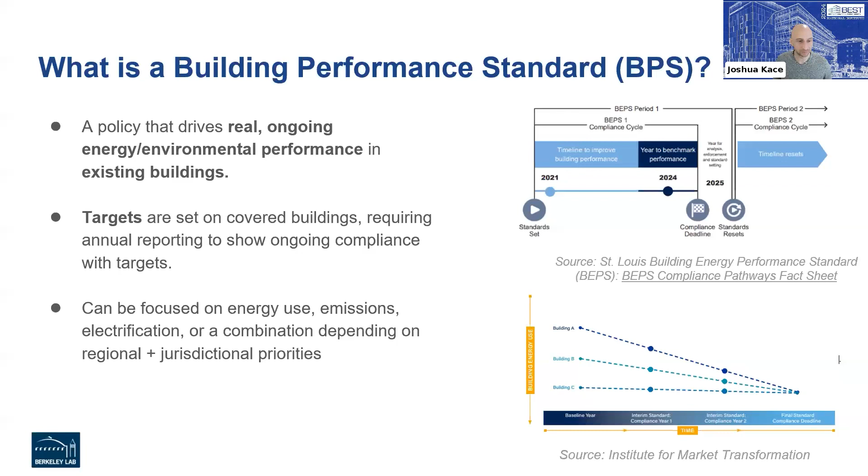So you might have a target, as we're showing in this visual, in 2024, and then a second compliance cycle forward looking into 2025. Each of those targets has different implications for each individual building. Most of the time, these targets are set at the property type level, but they are also sometimes set at individual buildings, depending on adjustments and other things that go into the overall administrative and compliance process associated with BPS.

And so we are seeing a lot of these policies pop up across the country. As I mentioned before, it is a relatively grassroots approach. Standardization has been coming, especially over the past 3 to 4 years. A lot of the work that we do here at LBL is to support standardization and transparency of these policies. But the growth is undeniable in terms of the number of cities, counties, or states that have committed to BPS as something they are looking to implement.

We're typically talking about larger buildings when we talk about BPS. So most policies are either 25,000 square feet and larger or 50,000 square feet and larger. There are a few policies that are going smaller than that over time on more of an iterative basis.

But right now, the cohort of buildings—this was led by President Biden standing up what's called the National BPS Coalition, a coalition of jurisdictions that have essentially committed to implementing BPS in the coming years—this current cohort represents 20% of the building square footage nationwide. So this is really in the early stages, as I was saying, but still already looking to affect a large population of buildings across the US.

There is also a federal BPS that was announced in December 2022. That applies specifically to federally owned buildings and has a couple different nuances associated with their approach, a little bit more focused on on-site fuel consumption, but it is also a huge step in the direction of ongoing performance evaluation of buildings. ACEEE is one of many organizations that have shown the overall savings potential associated with BPS implementation.

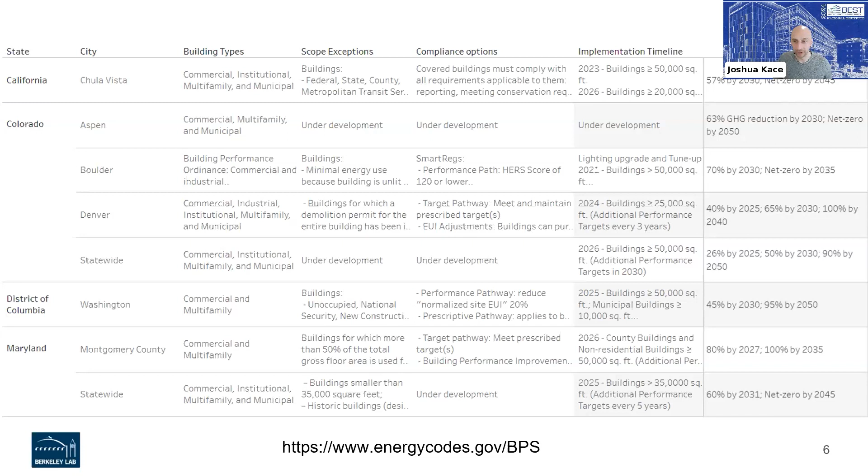And with that, I'll turn it over quickly to Nora to give a primer on the Better Climate Challenge. Thanks, Josh. So we're shifting gears just a little bit.

Josh was talking about building performance standards, which are required by jurisdictions for buildings in their areas to meet certain goals for energy use or emissions. Now I'm taking a step back to talk about the Better Climate Challenge, which is a voluntary program.

Organizations that commit to the Better Climate Challenge are joining this program that is run by the U.S. Department of Energy, and Berkeley Lab, where I work, is providing technical assistance.

When an organization joins the Better Climate Challenge, they are voluntarily committing to reduce their portfolio-wide emissions, scope 1 and 2, by 50% within 10 years. So organizations in this challenge may have certain buildings that fall under a building performance standard, while also having this large portfolio-wide target they want to meet for their whole portfolio.

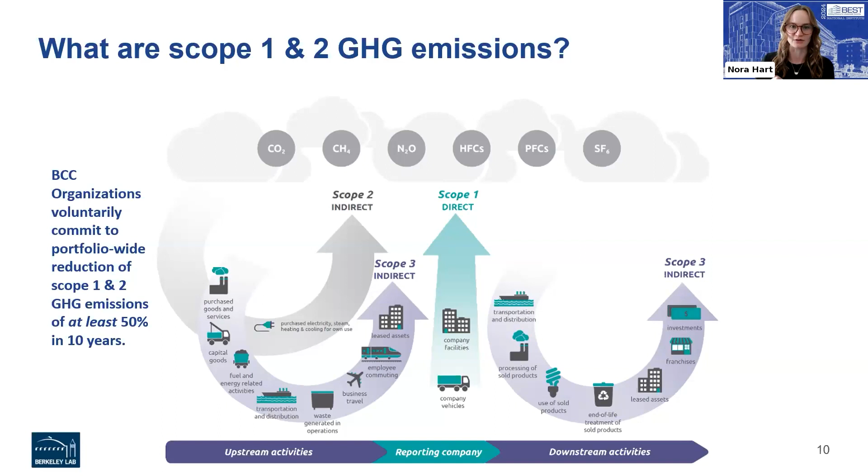Yeah, thanks, Nora. And it's a great introduction. Probably the question you all have in the back of your head right now is, why are we talking about these two things together? The reason why these things are tied together is really related to the fact that they're both supporting whole market adoption of high performance buildings.

They're doing it in different ways, obviously. Better Climate Challenge is a voluntary program. It's built around recognition. It's about forging new pathways for buildings at the cutting edge of either new technologies or new operational practices that drive decarbonization and that performance.

Building performance standards, on the other hand, are a little bit more focused on the late adoption side of the market, right? And this isn't just buildings that are being less proactive. There are real, both financial, organizational, and technical reasons why buildings, especially existing buildings, operate inefficiently today, despite the best intentions of a particular building owner, property manager, et cetera.

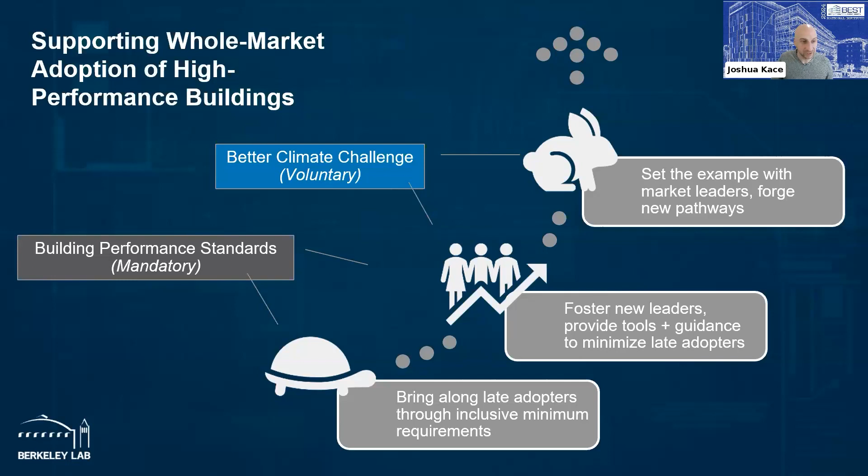And so we like to see these concepts sort of work in concert to help drive the market overall, based around the concept that you have new pathways and you have carrots and sticks associated with driving annual energy performance of buildings.

The other thing that really, almost more important than anything else, that ties these two things together is the empirical nature of the way that Better Climate Challenge and building performance standards operate. What do I mean by empirical? Your actual utility bills are going into whether you comply or not.

This is in comparison to, again, new construction codes where you may be able to design a building that operates efficiently, check prescriptive boxes in terms of either an energy model or design elements of a particular building, and be in compliance.

This is instead looking at the retrospective of how the building actually performed and evaluating you based off of that. And so because of that, design is only one of the dimensions you really need to be concerned about when you're looking at overall building compliance.

The other major component here is operations. You could have an extremely well-designed building. I can definitely say, as a former energy auditor in New York City, I have done audits of LEED platinum designed buildings with incredibly advanced control systems that are operated very poorly and are now really looking at big annual fines associated with their poor performance.

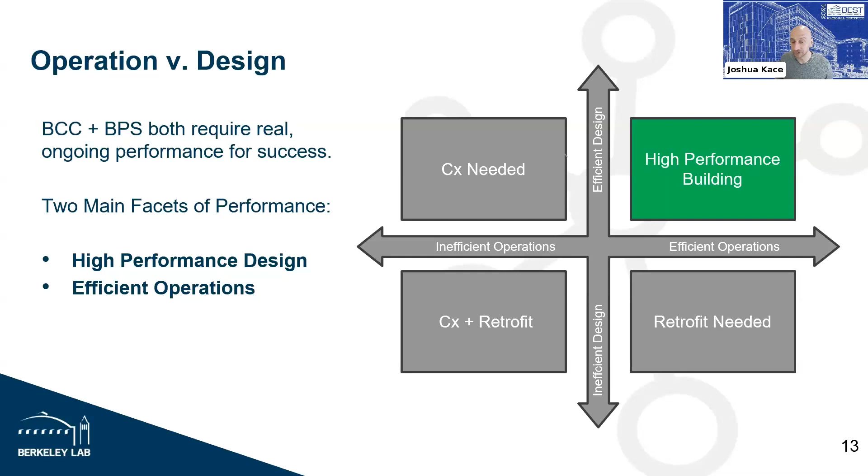And so this chart is really here to show the fact that design and operations really need to work in concert if you're going to drive a high performance building.

Just to put a little bit more of a point on this in terms of the dimensions I'm showing here, design could be anywhere from a net zero energy passive house design down to aging systems with a leaky envelope and pneumatic controls. You could have the best operator in the world, but if they're looking at that overall infrastructure at their building, they're probably going to struggle to comply with the BPS and or be delineated as a high performance building.

And so operations, again, and design need to come together to drive annual performance and ongoing performance of individual assets.

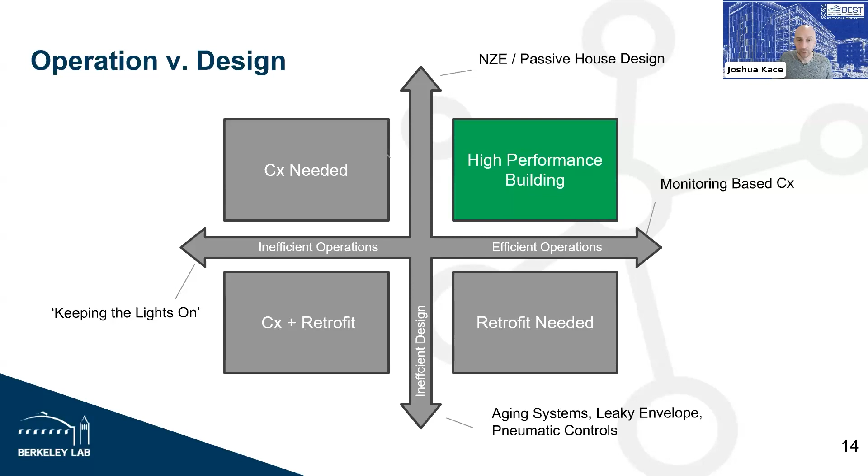So beyond the concept of operations and design, there are a lot of different barriers that exist in our market that prevent both of these dimensions from being realized. Over time, Better Climate Challenge and the BPS team have worked together and established really comprehensive lists of different barriers that exist, bucketed by—you can see here we're showing technical barriers.

That's obviously going to focus within the world of building performance for many, many years. You need equipment that is efficient. You need building envelopes that are extremely effective. Things like energy recovery.

Existing infrastructure being able to be converted into a new infrastructure based off of either a fuel type you need to use or overall performance you're trying to achieve. Technical barriers is one of those big buckets, but it's only one of the buckets. Market is just as important when it comes to making sure there's an associated financial interest in upgrading your building. Again, this market is tackled both by BPS and BCC in different ways.

And then organizational practices. So you could have energy efficiency projects on deck that make a lot of sense. You may not have the organizational structure to be able to make a strong decision on that. It's either not being prioritized or it's an unknown, right? A lot of organizations don't necessarily have the expertise to be able to say XYZ opportunities exist in my building for implementation. And it's hard to invest in something if you don't necessarily know the savings associated with it.

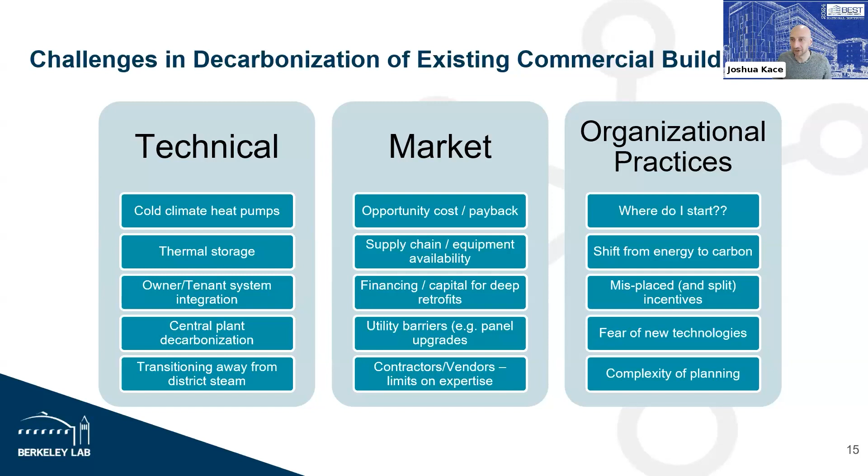So I'm going to go through each of these buckets in a little bit more detail and how some of the resources work together to support.

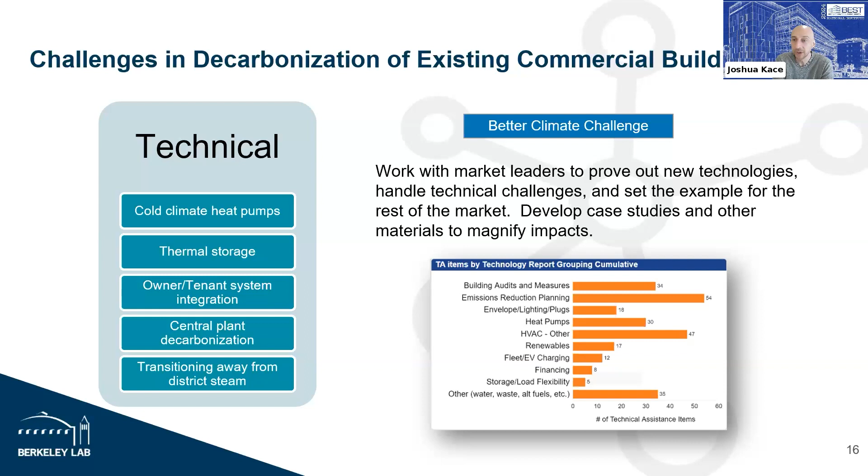Technical, Better Climate Challenge has been doing this for many years now, and they have a really impressive approach associated with technical assistance. They deliver direct technical assistance to organizations that are part of Better Climate Challenge. These are in-the-weeds questions associated with systems at individual buildings or across a portfolio, implementation practices, et cetera. Every time they have one of those engagements, they are not just helping that entity, they're also building knowledge bases and other resources that can then be used by others facing the same sort of issues.

Market-based barriers. BPS is actually a big—as I was showing in the slide earlier around the market—BPS represents really the biggest and only stick that exists on ongoing existing building performance. And that creates a financial signal within the market. So if I have a building that's facing fines because of a BPS requirement in 2024, my savings calculations associated with a particular retrofit or operational practice will be supported by the fact that you'd be avoiding a fine by implementing that recommendation or practice.

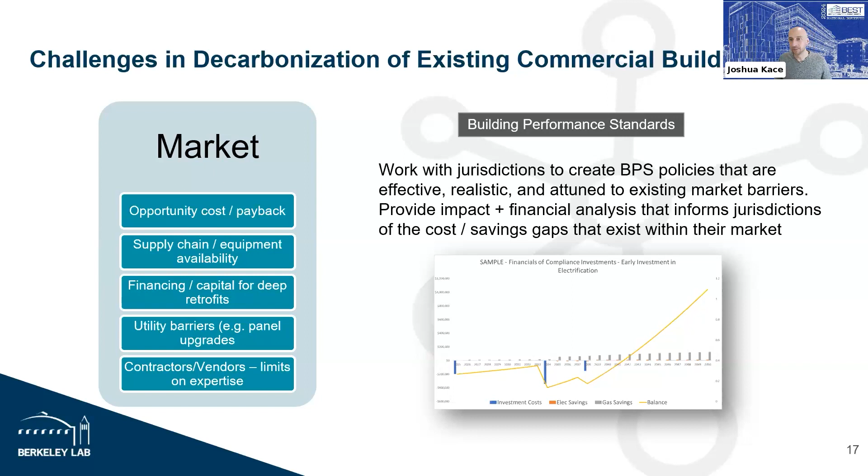So you have BPS helping to drive that back end of the market. And also, from the standpoint of Better Climate Challenge, they're working with organizations as a starting point—these are portfolio level targets set for real estate entities, school districts, et cetera, looking to implement and support a certain target. Because of that, they have a lot of amazing resources built around this concept of: I have a portfolio of buildings, I am an organization that needs to implement high performance buildings—where do I start, how do I go from there, how do I build a framework and structure that allows me to be smart about the way I decarbonize my portfolio? In that same way, building performance standards also support organizational practices overall at individual entities, and we actually work together on this as well.

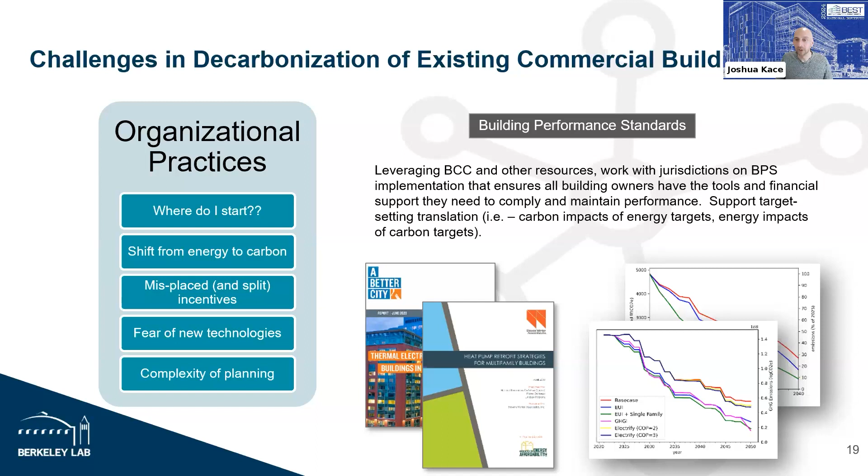So we've worked with jurisdictions that have asked us very specific questions—let's say it's a particularly cold climate in a given city, and they have a lot of boiler buildings fed by natural gas. They have green electricity. They want a policy that's going to electrify those boiler systems. Not necessarily an easy thing to do, particularly in colder climates. So we were able to work on the BPS team, work directly with Better Climate Challenge, to provide resources to that jurisdiction based off of past work they've done around electrification, and past electrification success stories in those types of boiler buildings. So we try to work together as we can to drive a lot of this overall work.

With that, I'm going to hand it back to Nora here to talk through our resources in a bit more broad way. Thanks all.

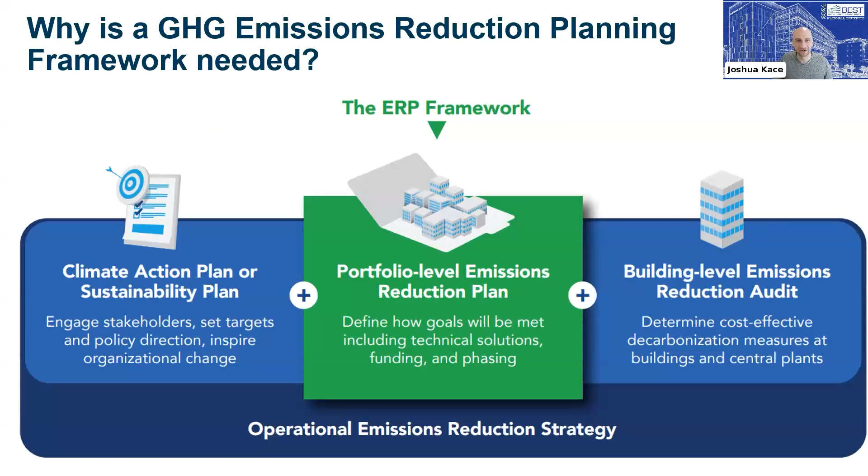Thank you, Josh and Nora, this was fantastic. We have one question here about how well documented and disseminated the standards and strategies are, so that cities and other entities can build on what's been done.

It's a good question, and one where over the past 24 months we've seen a lot of progress, both on landscape review of existing BPS policies and on technical resources around how to implement BPS. I'll call out a couple of key resources. ACEEE released a landscape study, I think in the second quarter of 2023, around BPS policies across the world, with a real focus on US BPS policies and the differences and similarities within them.